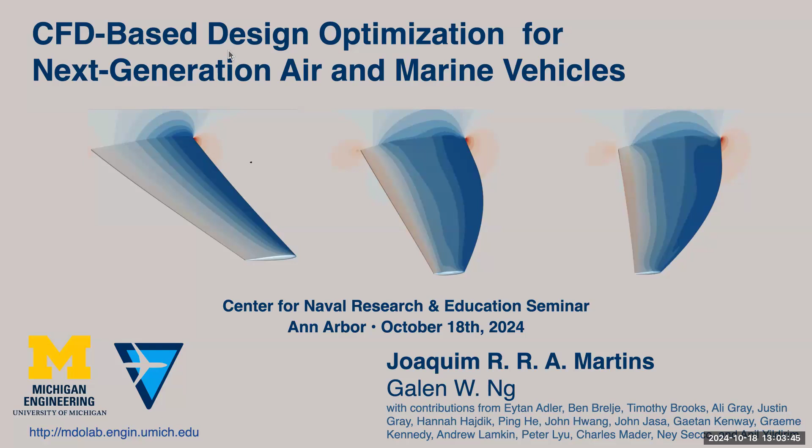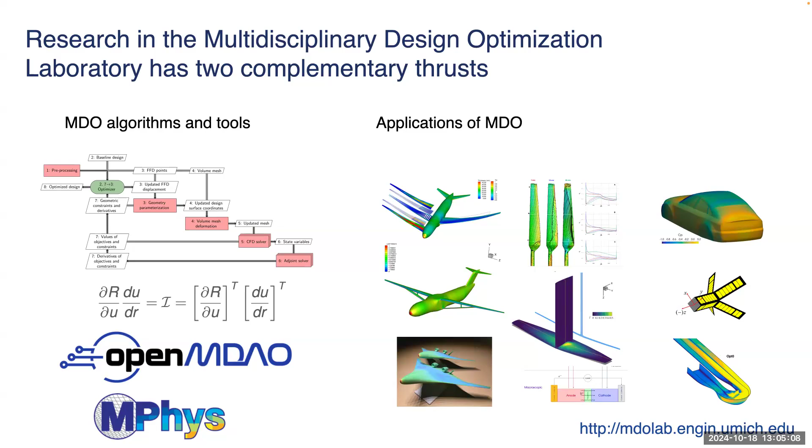Okay, great. Yep. Okay, so those are two main thrusts, the algorithms and the applications. And the applications started with aircraft design mostly, because that's my passion. But then seeing the problems we had solved with aircraft design, we looked towards applications using those same tools. So wind turbines, hydrofoils, even things like aerodynamics, satellite design, and so on. I'm not going to talk about a lot of these applications. I'm going to show some on the aircraft and then the naval applications.

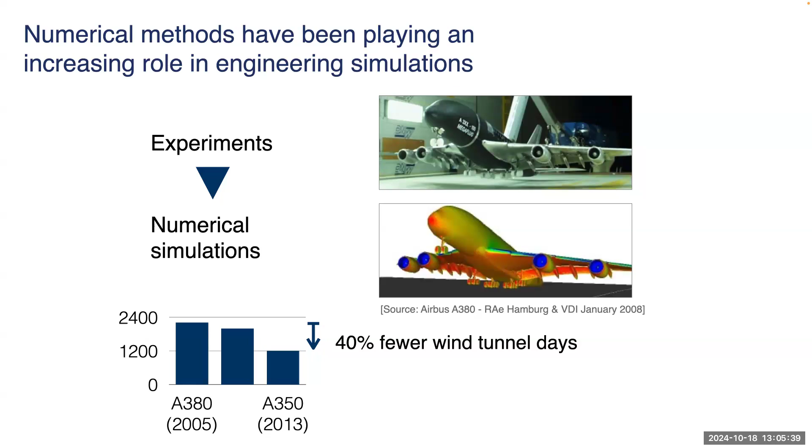All right, so in terms of advanced numerical methods, I don't think I need to sell this to this crowd. But the fact is numerical methods or numerical simulations are replacing experiments. As an example, in aerospace, from the Airbus A380 to the Airbus A350, we had 40% fewer wind tunnel days. And I believe the same is happening in naval, although I haven't checked, but I imagine so. And that's really important. There's a lot of effort here in this center, for example, to really develop simulations, make them faster, make them more accurate, right? And that's really important, right?

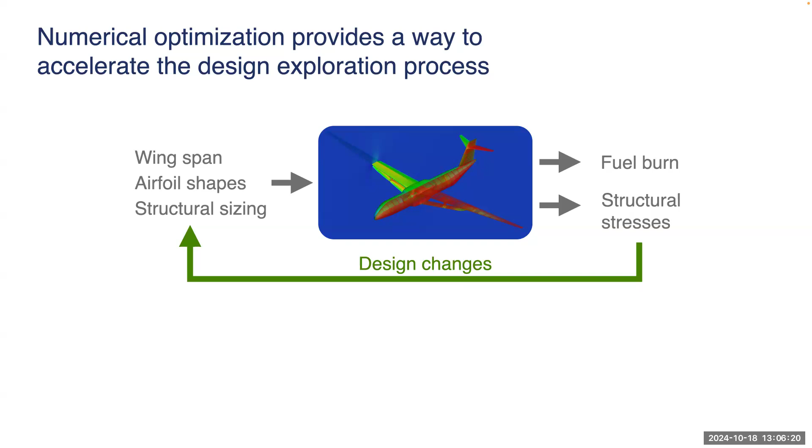But when you think about how you're going to use your simulations, one big application is design, right? And what you do with a simulation when you're doing design, you need to make design changes, right? The chances are the first design you come up with is far from optimal, right? Or not even feasible, and you need to make a design change. And typically these are done by hand using intuition. Maybe you start with lower fidelity simulations, make changes, and so on. It's a very iterative process. And this is where optimization can help, right?

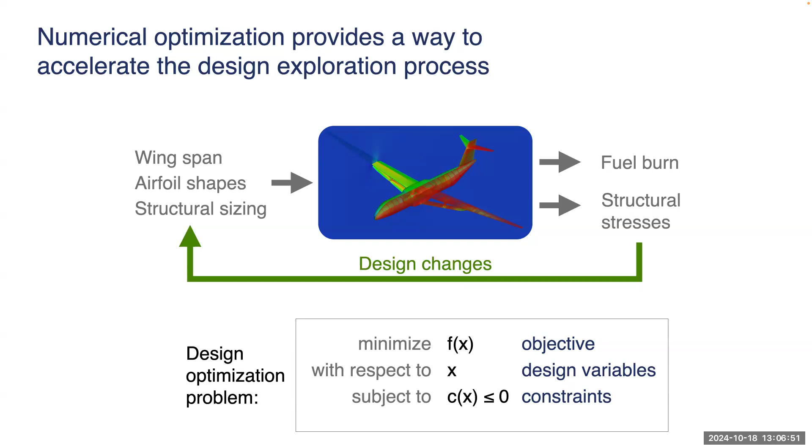So if you have thousands of decisions, thousands of design variables to decide on, what are the chances you're going to get that combination just right? So optimization helps you navigate that n-dimensional space by defining an objective function that you want to maximize or minimize, and then defining the design variables you can change, and design constraints. The idea is that once you define this, you press a button, and out comes your result, okay? I learned the hard way that doesn't quite happen, okay?

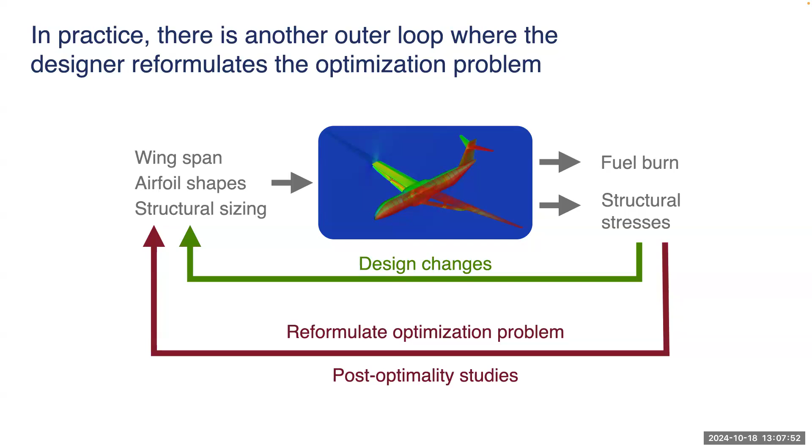In reality, this becomes more of a design exploration tool rather than a one button press solution. Typically, you look at the results and end up reformulating, because you want to add more variables, redefine variables, add or remove constraints, and so on. Maybe you want to change the objective too and try different objectives to see what you get in terms of the trades. This is really important, also learned the hard way: you need to understand what you're getting. You can't just say mathematically this obeys all the optimality conditions, so it's the best design. You need to explain why you think the optimization arrived at that design, and eventually validate it. This is where post-optimality studies come up.

In terms of MDO, multidisciplinary design optimization, which is getting together multiple disciplines, considering their coupling effects, and then considering the trade-offs when you do design. One thing is to consider coupled simulation. The other thing is to do coupled design, where you need to do trade-offs.

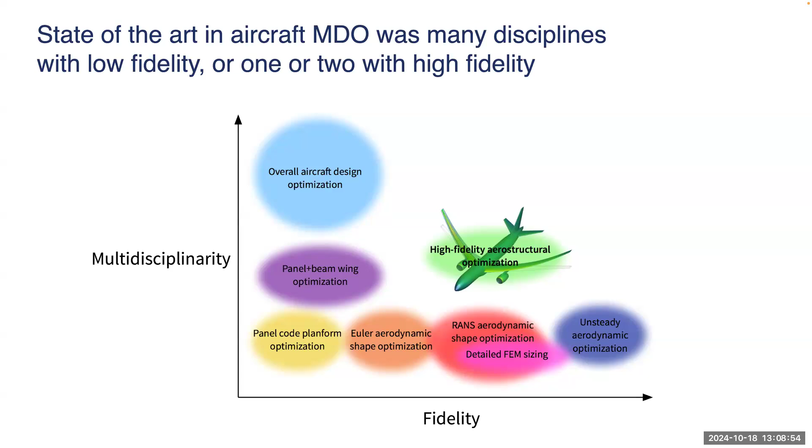The other one is to increase the fidelity on the disciplines themselves, on the simulations. We've been going this direction with single disciplines like aerodynamics, higher and higher fidelity with optimization, and structures as well. But what we've tried to do is go on a diagonal and do two or more disciplines with high fidelity coupled in optimization. I'll show you some results of that.

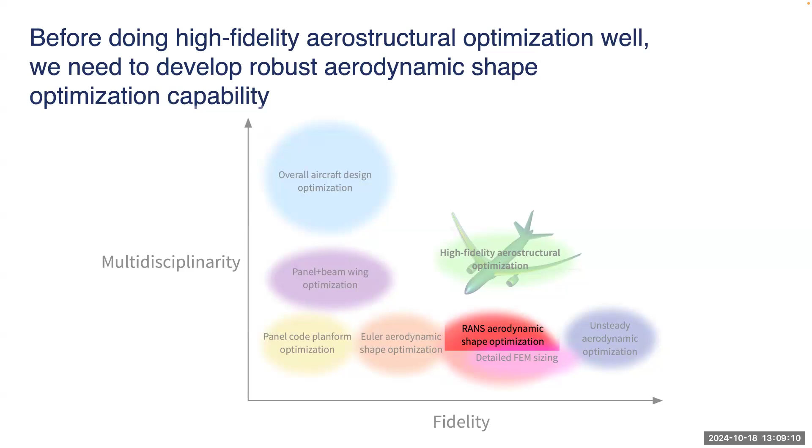But first, I'm just going to talk about CFD, specifically RANS-based aerodynamic shape optimization. To do our optimization, we use gradient-based methods, because these are the only hope for a large number of design variables.

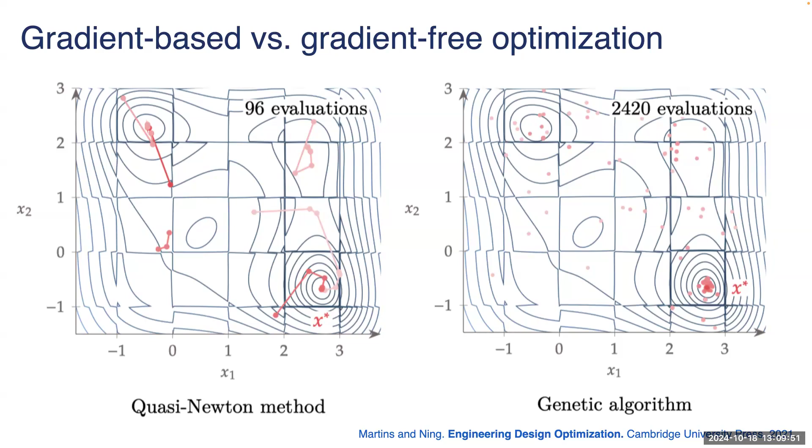But when we scale things up and increase the number of design variables to thousands, we can see that the number of function evaluations needed for that optimization goes up dramatically for gradient-free methods. This is a log-log plot, by the way. But if you can do gradient-based optimization, you reduce the slope significantly. For example, if you use finite difference gradients, you decrease the slope, but it's still pretty high. So the key is to have gradient-based optimization with analytic gradients.

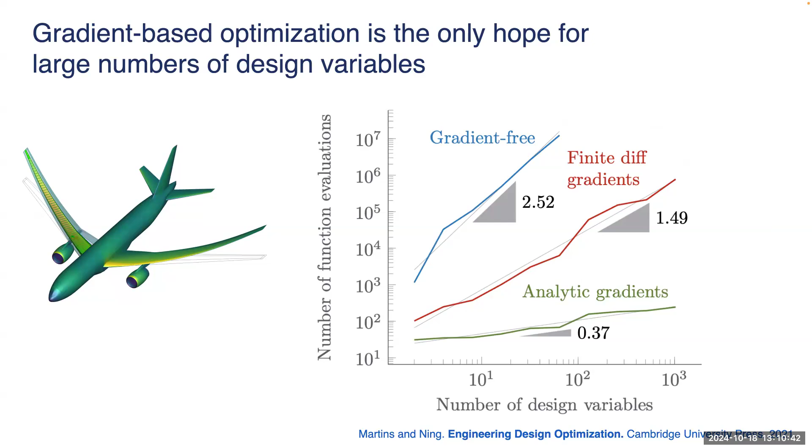So if we can use gradient-based optimization and compute the gradients efficiently, then you're way ahead. You can do problems with thousands of design variables. And this is what we've done. So all the work you're going to see is enabled by this approach.

This led us to develop a framework called MACH-Aero, which couples an optimizer. The optimizer decides what the design variables are. Typically our design variables have to do with geometry parameterization, though there are others. Once you change the geometry, when you're doing CFD, you need to change the volume mesh, so there's a whole approach there. And then we have our CFD solver, and then the adjoint solver, which computes the gradients efficiently. More about that in a bit.

And so this loop continues until the optimality conditions are satisfied. All this is open source software, and each module is wrapped with Python. The underlying code is either C, C++, or Fortran, but everything is wrapped with Python, and I'll talk a little more about these.

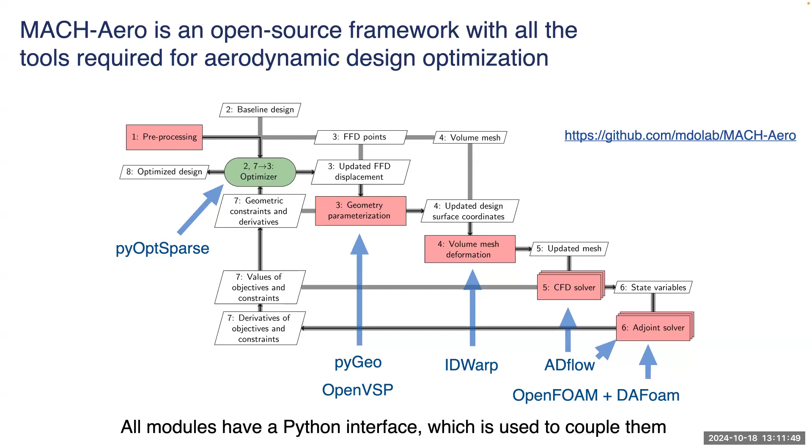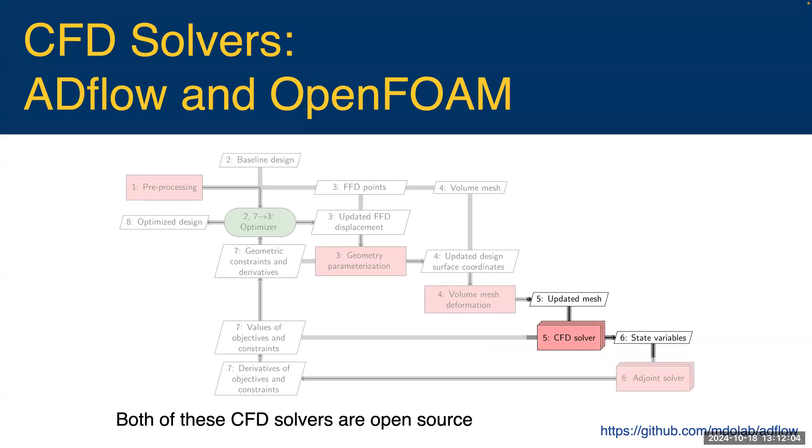In terms of CFD solvers, this is a modular framework, so you can actually use multiple CFD solvers as long as they have the same Python API. We actually have ADflow, which is our in-house solver, more on that in a bit, and OpenFOAM, which is a well-known open source solver. There's also a NASA solver that's been wrapped with Python, Fun3D. But most of the results I'm going to show you here are from ADflow.

These, of course, are parallel codes using overset structured meshes. And very critically here, we use this approximate Newton-Krylov method. This is really critical because we need very robust CFD to do optimization, because optimization will ask for all sorts of crazy things that a designer would not.

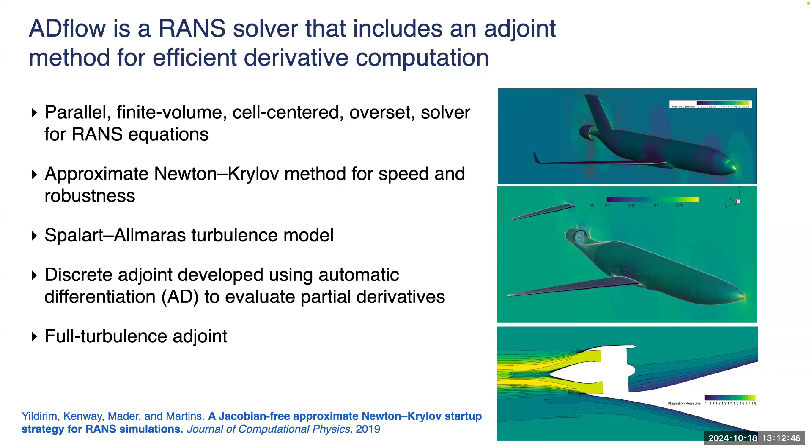We also use a Spalart-Allmaras turbulence model that's fully differentiated with this adjoint. Just to show you how robust this is, here's an airplane, a 777 size airplane, basically at 90 degrees angle of attack, at Mach 0.85. This does not happen in reality. In fact, it's impossible, but it's just to show that we got the flow to converge.

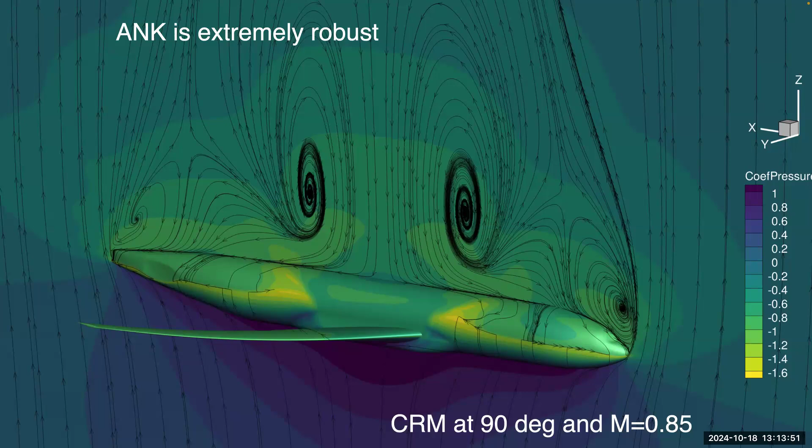Now, if you know anything about flow physics, you realize this is not physical, because the flow should be unsteady. But the point is we can still converge it. Of course, you need to be careful with this. If at the optimum you have something that converges but is not physical, you need to realize that. Typically this is not optimal, it's not an optimal flight condition, but intermediate steps could be. It's important to converge so that your whole optimization process doesn't stall. You don't want to wake up in the morning and find you did a few iterations and stalled, as opposed to chugging through and eventually getting to the optimum.

In terms of geometry parameterization, it's also modular, and there are 3 different tools that we've wrapped. I won't go into detail on all of them. Our in-house one is PyGeo, and this is how it works.

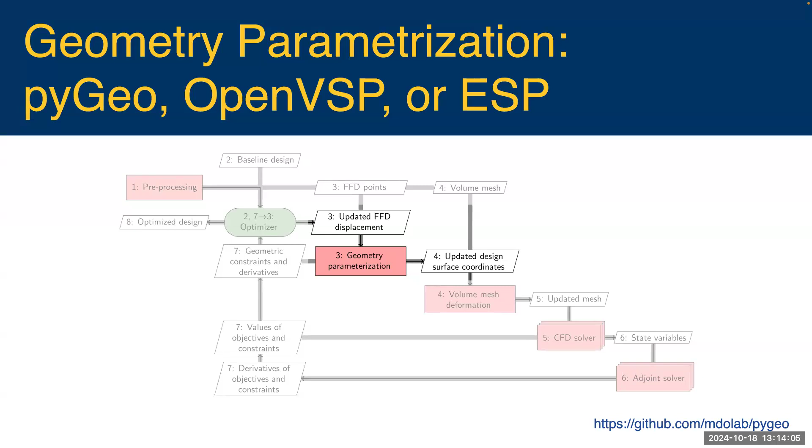There's a freeform deformation volume that you put around the geometry, and then you can move the points on the surface of this volume, and everything inside gets interpolated with 3D tensor splines. So we can do aerodynamic shape of the airfoils, we can do span, sweep, and also twist.

This is a volume that has the geometry inside, so it's not on the surface, but it's close to the surface, ideally quite close. Some people like to talk about putting the airplane in a piece of jello, and then you move the outside of the jello and everything inside gets deformed. That's FFD.

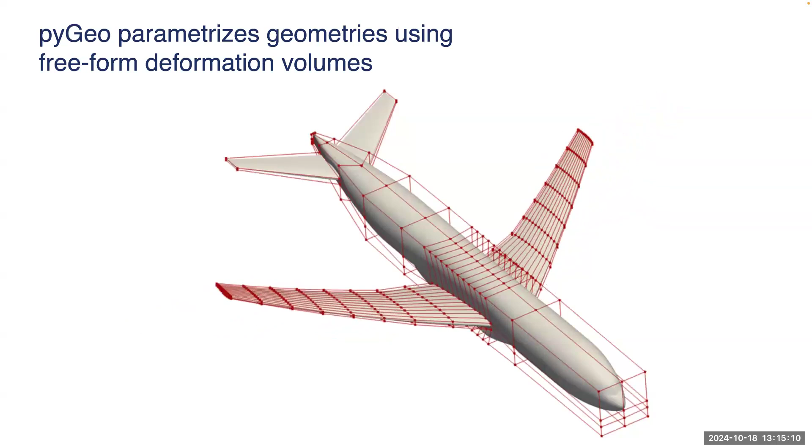We also have used OpenVSP, which is a different way to parameterize, but we won't go into it.

And now for the mesh deformation. Once you change the geometry, you need to deform the mesh. Our tool is called IDWarp, and it uses an inverse distance approach. The key thing about all these modules is you don't just need them to work as in analysis, you need them to be differentiated, because we're going to have gradients of the whole thing, the whole chain.

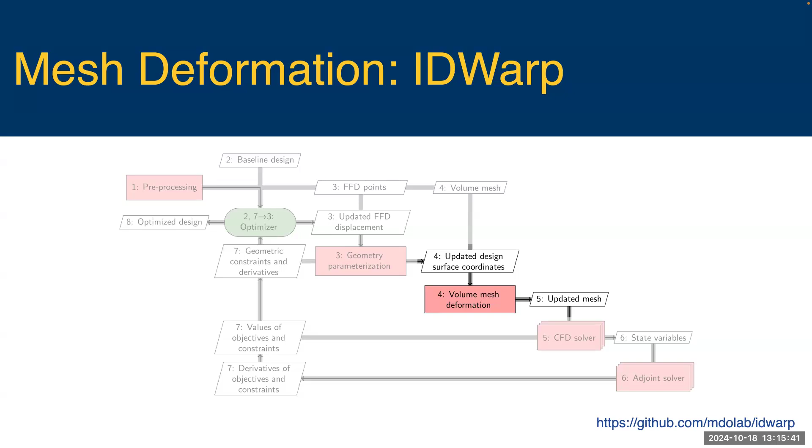Here you can see IDWarp working together with PyGeo, where we change the surface of the airfoil, just a 2D case. You can see how the volume is on the outside of the airfoil. Move this point, everything inside gets smoothly deformed. Then, as a separate step coupled to IDWarp, it propagates those changes to the far field in a smooth way, so you have nice CFD. You don't always get nice CFD, and you don't always get a nice mesh, full disclaimer, but mostly we do well enough for our optimizations.

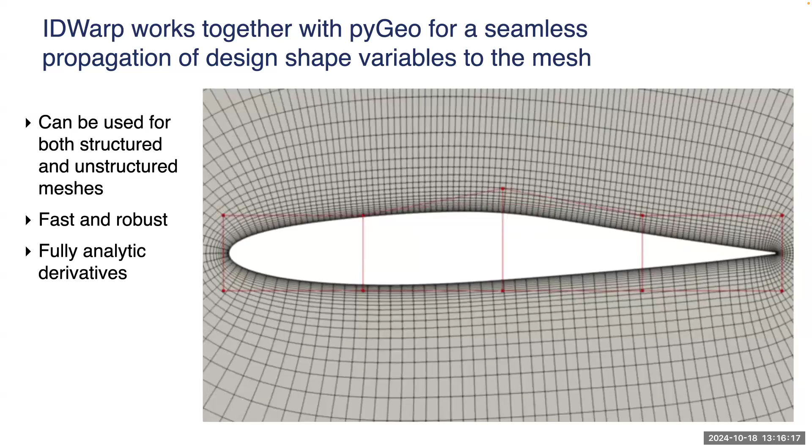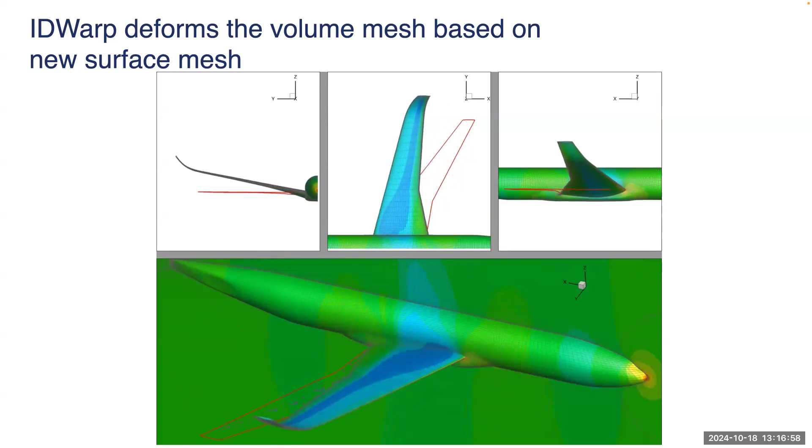This is a similar thing in 3D, showing the CFD solutions for every step here. This is not an optimization, it's just a way to show off the robustness of the tools. We basically took a wing, a 777 size airplane wing, unswept it completely, extended the span, added dihedral, folded the tip, and you still have a valid mesh. Again, full disclaimer, one step after this the mesh failed. But it's enough to do planform optimization, which was unprecedented in this type of CFD-based optimization.

Now for the optimization algorithms. As I mentioned, gradient-based, we use an algorithm called SNOPT, which implements sequential quadratic programming, and we developed a wrapper for it that we then extended for multiple optimizers. The idea is instead of each time using a different optimizer and needing to read the manual and conform to that API, this is a unified API where you don't need to get too much into the weeds of each optimizer, just select which one you want. As long as you follow this API, you're good to go. This is open source and includes a tool to visualize the results.

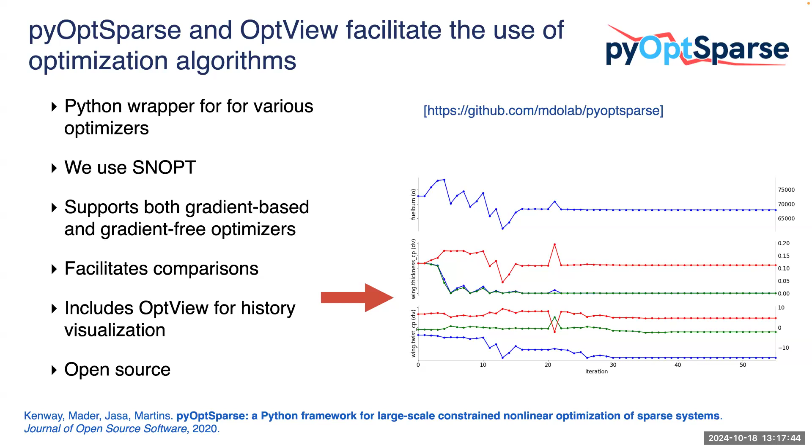All right, now for the derivative computation or gradient computation, which is really critical. Won't go too much into detail, but just to give you an overview of different methods for computing derivatives, I look at it as three different paradigms. One is you zoom all the way out, all you see is inputs and outputs, and you want the derivatives of these outputs with respect to these inputs. This is a vector in general, this is a vector in general. You can't do much there except do finite differences.

There's another approach called the complex step. If you haven't heard about it, check it out. It's really neat, very useful. And if you have the source code, you can actually do this. This is not efficient though, the cost here is proportional to the number of x's, the size of x. So this is out for hundreds or thousands of variables.

In the middle here, we have another paradigm. Now we open the box. Now we can see inside, we can see the equations you're solving, you can see the solver, you can see the state variables, you can see the functions, how they're being computed with respect to the state variables. Then you can differentiate this, I'll show you in the next slide, and find an efficient way to compute the gradients.

The next one is you zoom way into the code, looking at every single line of code. Then you can use what's called algorithmic or automatic differentiation, which is software that goes through your code and differentiates every single line. It's sort of a brute force approach. In reality, what we do is we combine these two. We form these equations, which we know what they are, and then compute these partial terms with AD.

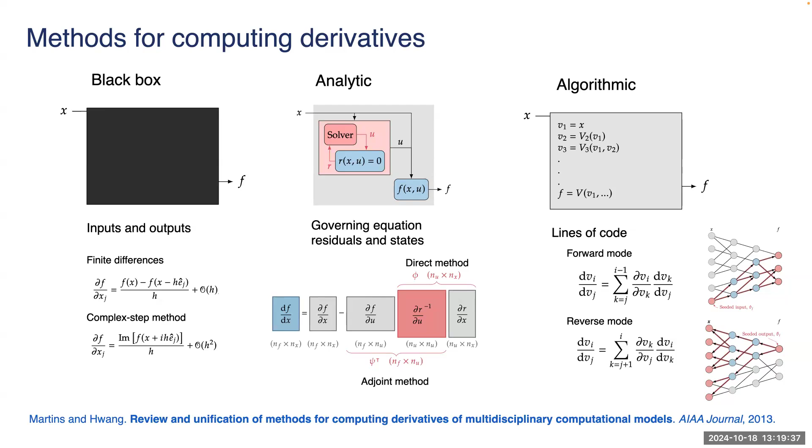A little more on the adjoint method. So again, we open the box, we know where the residuals are, we know what they are, the states and so on. And now we're going to use the general approach to do these derivatives.

We have a total derivative of f, considering two paths. The one that goes directly to f, that's this partial derivative, and the one that goes through the solver, that's the second term with the two terms there. The partial derivatives are easy to compute, and cheap to compute. Sometimes not so easy, but much easier than others.

But this total is challenging because it needs to consider the solver. So du/dx needs to consider this path, that's what makes it total, because it requires resolving the problem. We don't want to resolve the problem. We don't want to linearize this, so we don't need to deal with the simulation again. Just do one simulation, then do the derivative solve.

So the trick here is to look at the residuals and realize that the total variation of residuals has to be 0 for it to remain feasible. And so we can write this total derivative here, and then rearrange to get a linear system whose solution is du/dx, and replace it in there. And what we get is this equation.

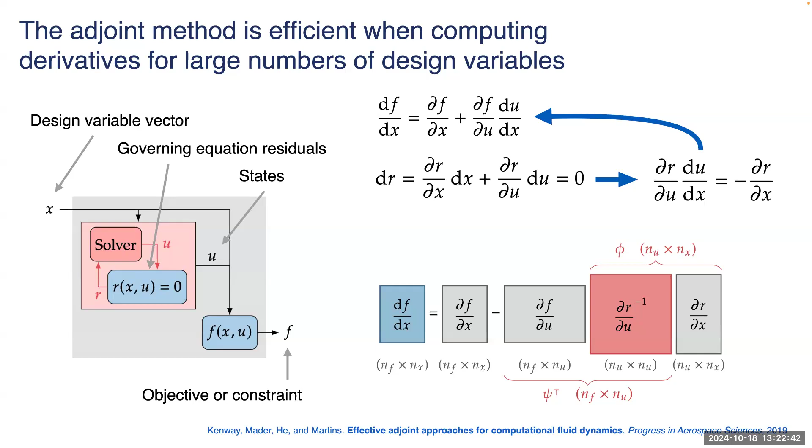So in these aerodynamic shape and hydrodynamic shape optimization problems I'm going to show you, we have 2, 3, a few more maybe objectives and constraints. So number of f's is a few, number of x's is hundreds or thousands. So there's no doubt that the adjoint method is going to be advantageous there. And that's the main thing about the adjoint method, it just makes it much more scalable with respect to design variables.

That's the key. So these are some overview. If you want more details, the PDF of my book is available for free, and you can read it at your own leisure.

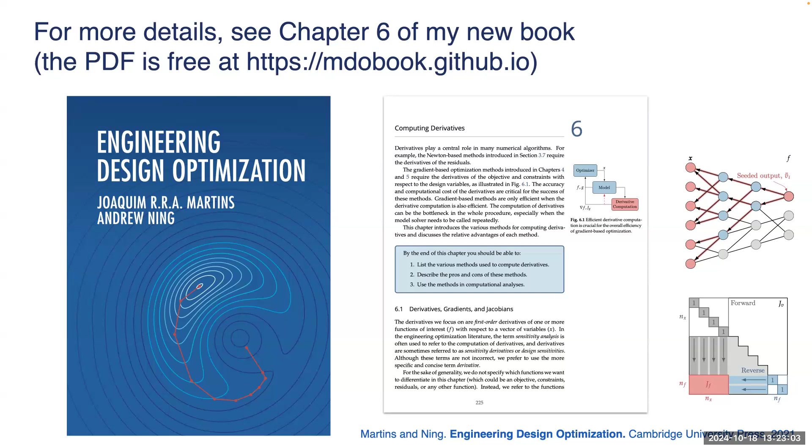I'm also teaching AE 588. I think I have a couple of naval students in there.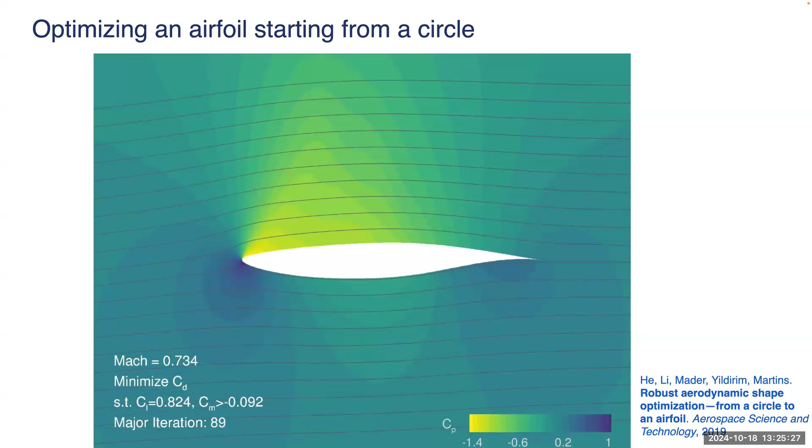It's a bit of a detail - only major iterations are shown, and within major iterations there are minor iterations that go crazier, not shown here. I have a screenshot somewhere, but didn't include it. Anyway, even solving this steady, you'd consider this challenging to converge.

All right, so now for 3D, this is a benchmark - again that wing from a 777-size airplane. It's a benchmark done with a group in the community, and this is something we solved: fixed planform, optimizing all these shapes.

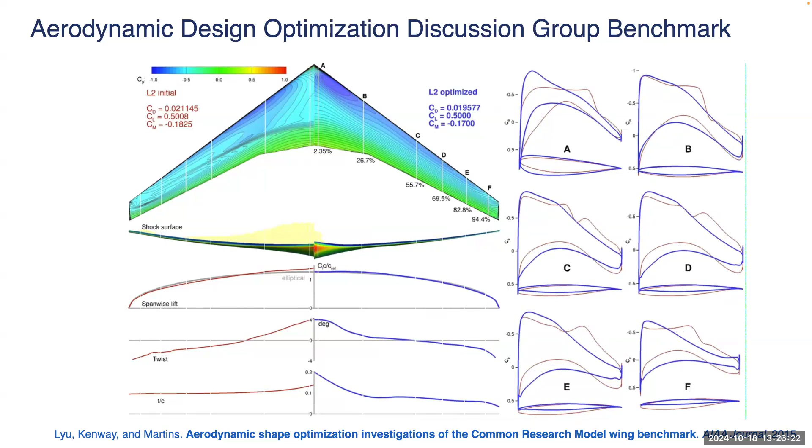You can see for minimizing drag at one condition, we again get that supercritical airfoil. The airfoils were supercritical to begin with here already because it's a reasonable design, but it eliminated the shocks and reduced the drag considerably. You can see just qualitatively looking at these pressure isobars how nice and parallel they are relative to the shock you have here - an elliptical distribution, the textbook solution you'd expect.

Now going on, this typically takes a few hours, depending on the number of cores. We always aim to do things overnight, but some of the more complicated, more involved simulations - the optimization takes maybe 24 to 48 hours, but typically never more than 2 days, because that would severely lengthen graduation times. And because we want to do multiple optimizations, try different things and so on.

But we do keep an eye on that.

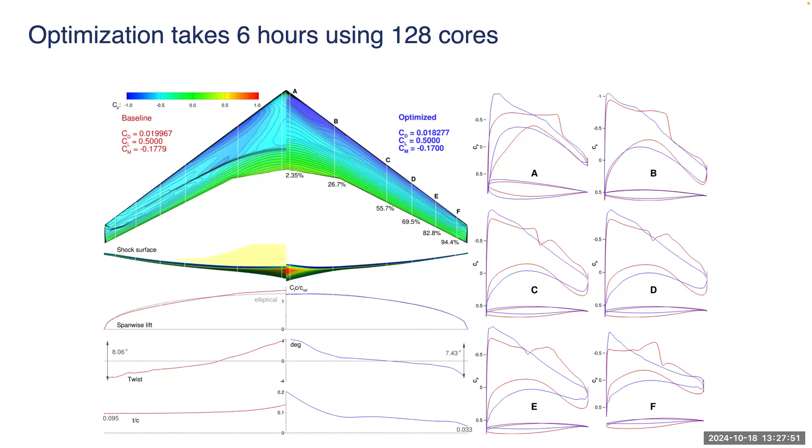So on that theme, starting with something else, I actually challenged my students at the time to give me the crappiest wing that you can start with and still get the same result. And he showed up with this. I thought he was joking. I said, this is not April Fool's today.

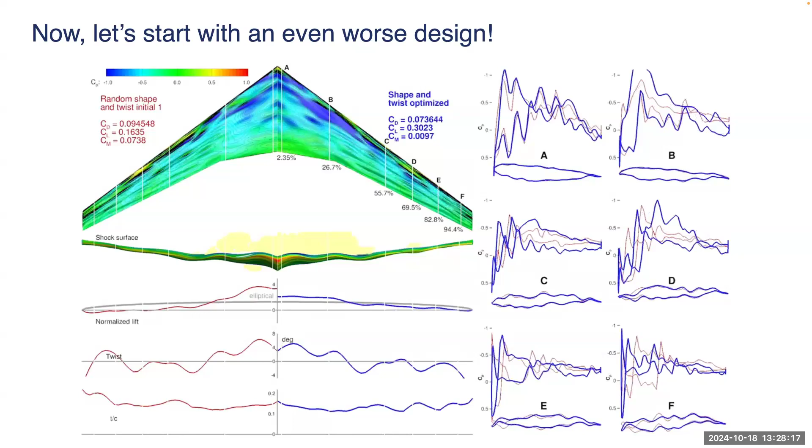But it did work, it just takes a bit longer. Again, the physics, the simulation on the first few iterations is wrong because there's separation and whatnot, and it's forcing to be steady. But the gradients are pointing in the right direction, towards flattening that shape, removing those wiggles. Once you get to this shape, now the physics are valid.

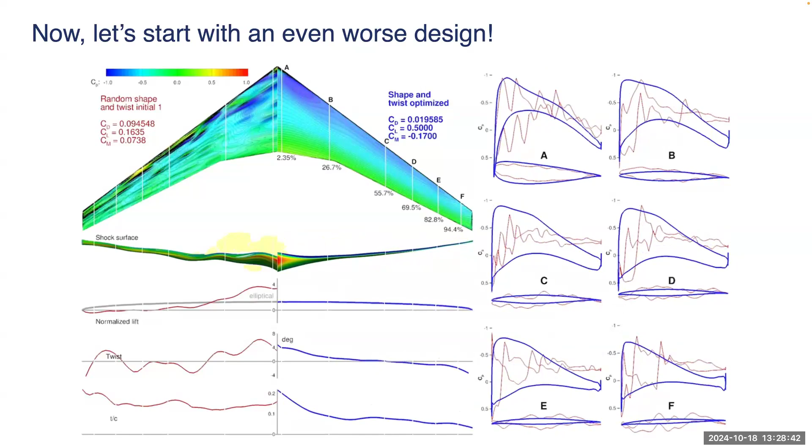On the theme of validation, we published all the geometries and grids, baseline and optimized, online and made them available, hoping people will try it. ONERA in France did download those and analyze and verify, but the one that was really a big success for us was the validation that Boeing did with their adaptive mesh refinement code called GGNS, their state-of-the-art. We got within 1/100th of a count in the result. So the results are now pretty old, but they age very well.

You can see on the drag polar, of all the others that tried this problem, we got the best, the lowest drag for what was asked. We minimize the drag at this CL. And you can see the drag polar is really specialized to reduce the drag there.

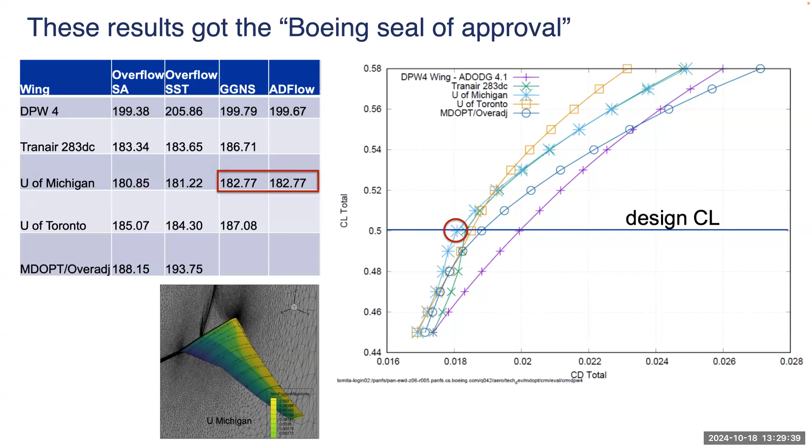Now, being academic, I like these sort of problems, and I always dreamt of doing this optimization starting from a sphere. Take a sphere, put it in the simulation, run an optimization, press a button, out comes an airplane or a submarine. And this one here, actually, in retrospect, could be sort of a single-person submarine. And if you wanted here to minimize the drag, subject to containing the person.

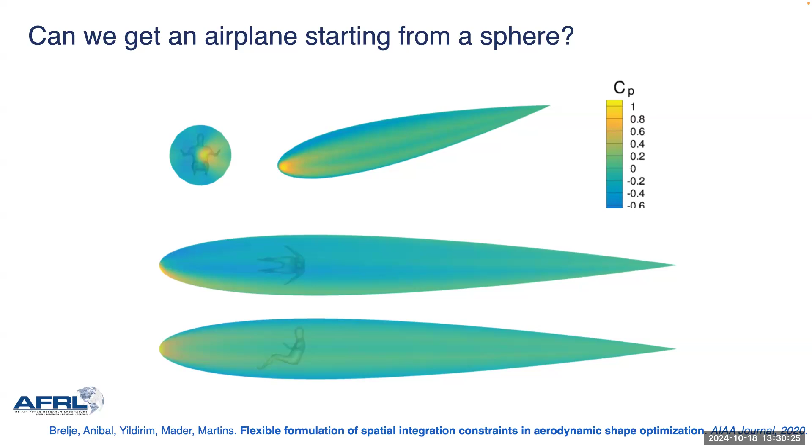It's a packaging problem. So we actually developed an approach that does this for arbitrary shapes inside the package. In this case, we put a person in there. And what happens there, if you minimize drag, there's no lift constraint in this case, just minimize the drag, this is the shape of your single-person submarine. Of course, you're probably going to need some other systems and whatnot, but you really reduce the skin friction drag a lot by reducing the area and shrink wrapping the person and making it non-axis symmetric.

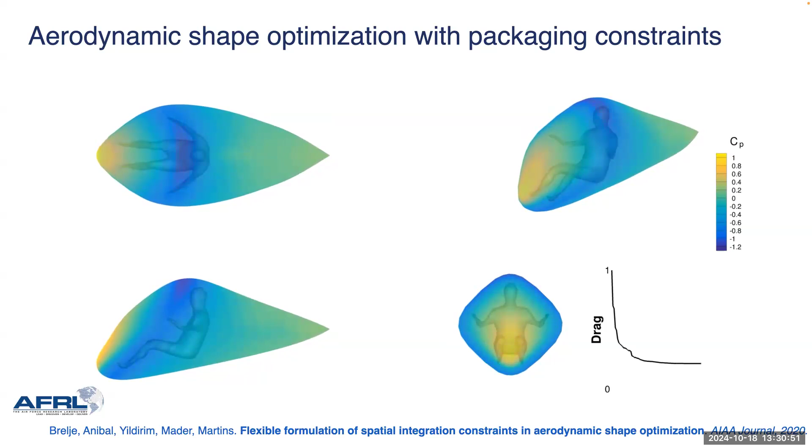So there's a lot of applications there, if you can imagine. Now, that's just aerodynamics, but that's not enough because wings are flexible.

Can I ask a question about the person problem, and even the air problem? In terms of the geometrical parameters, does it boil down to constraints on thickness in different directions? No, it's more general than that. We have the thickness constraints, we have volume constraints for a long time, but what we are wanting is something more general, where it's really about that shape. What happens is we need to compute all the distances from the surface to the outer mold line, so like a distance function from the surface. Yeah, exactly. How you do that, there's a lot involved there, explained in the paper.

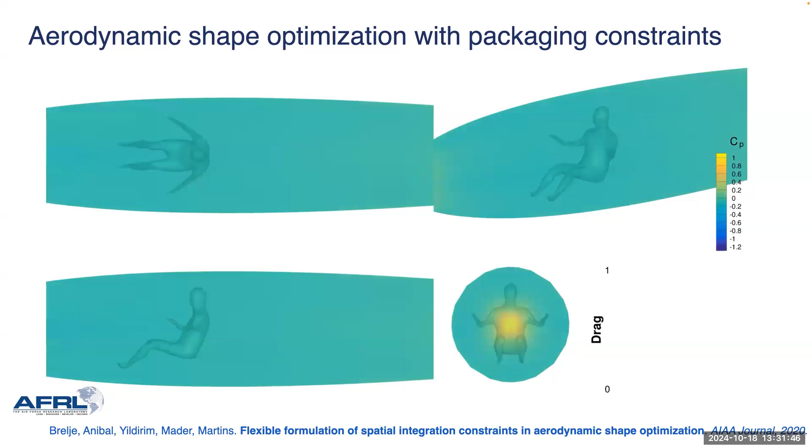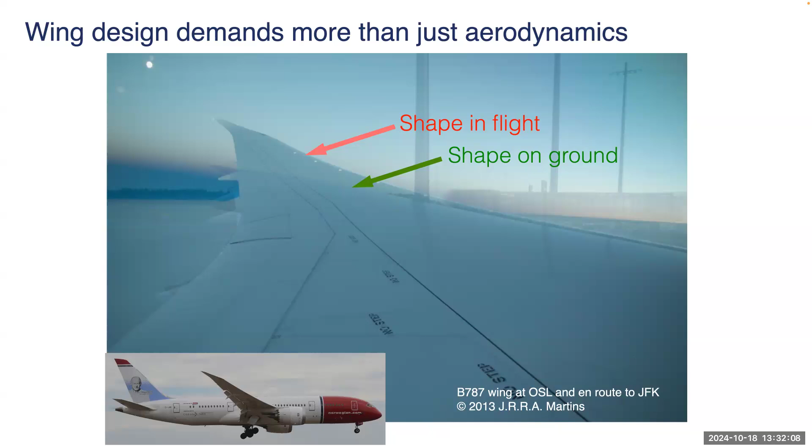Aerodynamics or hydrodynamics is not enough. Structures are flexible, so we need to consider that. These are two photos I took on my first flight on the 787, flying and on the ground, and you can see the difference. Actually, it doesn't do justice because if you look at 787 wings, they're really very flexible. And it's a beautiful thing to see.

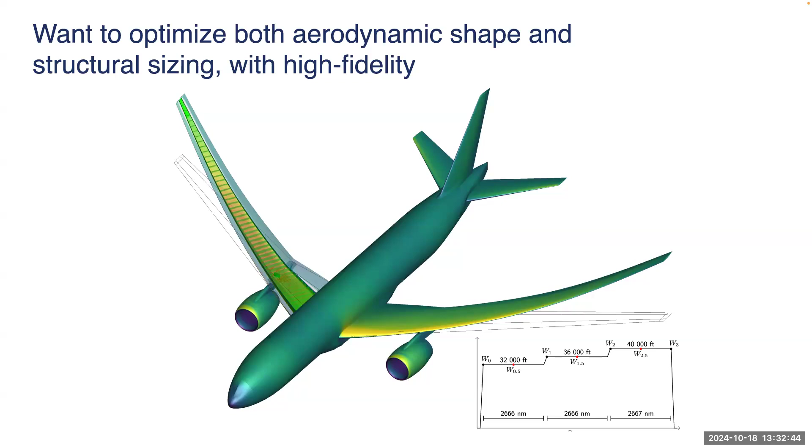So what we need to do then is to couple the CFD with a finite element structural model. In this case, I would say medium fidelity, not super detailed, but more than just a beam. It's actually a built-up wing box, coupled to find the actual shape at each flight condition. So depending on the flight condition, you have a different shape. We consider that, but then we also want to optimize not just the external shape, but the internal structural sizing. So here's the framework that we developed for that, an extension of what I showed before with the addition of the structural solver. Now we couple the structural solver with the flow solver and then this inner loop to find the shape at that flight condition.

Now, the next trick, and it is a big one, is we now need a coupled adjoint solver to find the gradients considering the coupling. If you imagine changing the size on one piece of the structure, that changes the displacements. The displacements change the loads, the loads change the displacements back. It's a coupled effect, and that gradient needs to take all that into account, and it does. But then you need to develop this coupled adjoint. So the equations I showed, you need to augment that with the structural system, then do off-diagonal terms and get the coupled derivative, the coupled adjoint system.

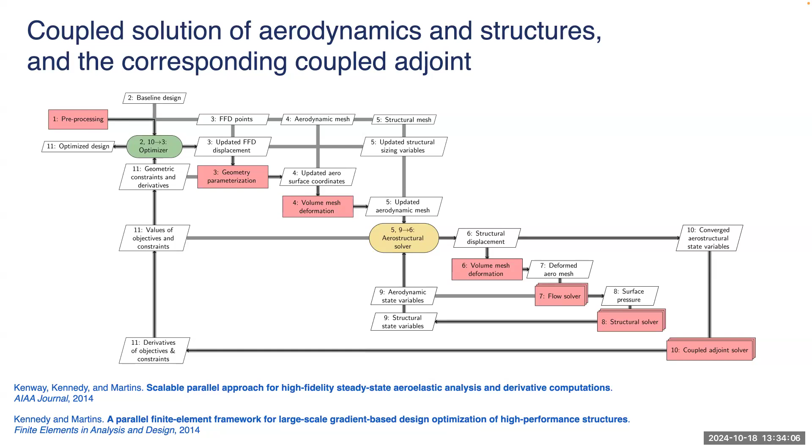We actually generalize that approach for more than two systems in general, in a framework that NASA is now maintaining called OpenMDAO. One of the core capabilities is doing the coupled adjoint for multiple arbitrary disciplines and solvers. But I won't get more into it.

What I'll show you is the aerostructure optimization. Again, this is that same Boeing 777 size airplane, called the Common Research Model. It was developed by NASA jointly with Boeing. What we did, because that was developed by aerodynamicists who just defined a shape as a single shape, not flexible, we reverse engineered a structure such that at the nominal flight condition, we retrieved exactly the same shape.

The other thing we get out of this optimization is now we're optimizing the built shape, which we call the jig shape. By doing that, we're directly optimizing what's going to be built, taking into account how it's going to perform in flight. Typically in industry, they tend to optimize the shape in flight and then reverse engineer the jig shape to be built. Here we optimize the jig shape directly.

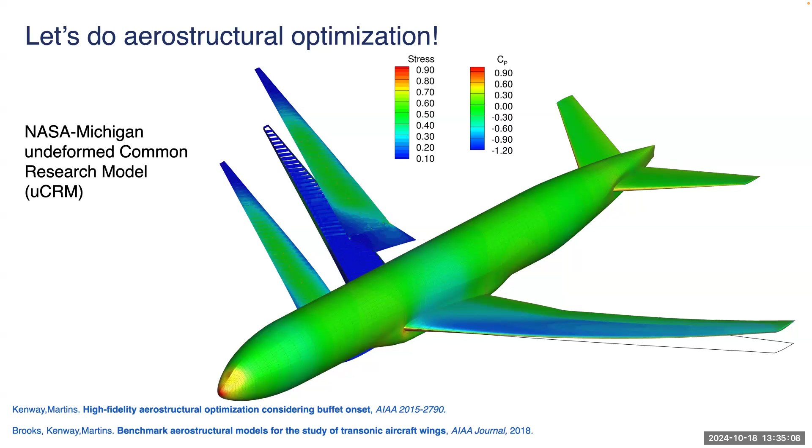In terms of design variables, we have airfoil shapes, but now the airfoil shape is coupled to the internal wing box. So whenever you change the outer mold line, you need to change the internal wing box as well. All that is linked. Then we have sweep, we have span. We also have a tail rotation because we need to trim the airplane.

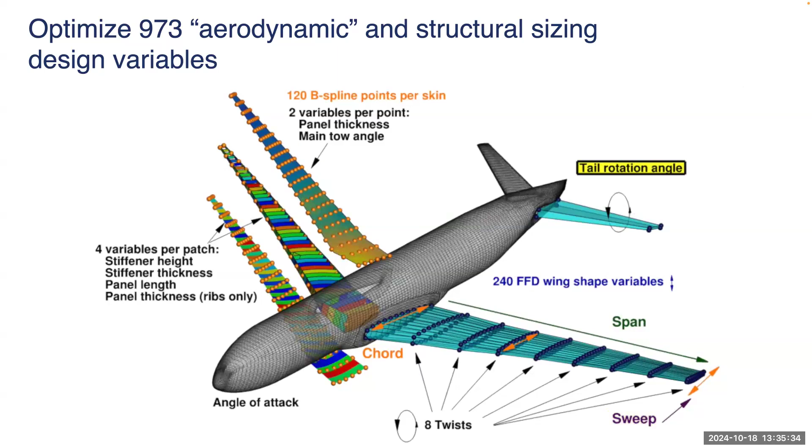There's a lot more to this problem that I'm skipping. It basically has about 1,000 design variables, I kind of showed that to you. But it also has multiple flight conditions for cruise, where we're computing the aggregate fuel burn, and multiple conditions for loads. On those conditions, we don't care about fuel burn, we don't care about drag. All we care about is that the wing doesn't break off. So there's a pull-up condition, a push-down condition, and a gust condition.

But we get very different results. Fuel burn really extends the span because it's more biased towards reducing drag. We're considering both weight and drag and their trade-off. But when we minimize fuel burn, weight is important, but drag is more important, so it extends the wing to reduce induced drag. In the process, you get a wing that is heavy, but burns less fuel. If you minimize takeoff gross weight, drag is still important, but it's more biased towards weight, so you get a lighter wing that burns more fuel.

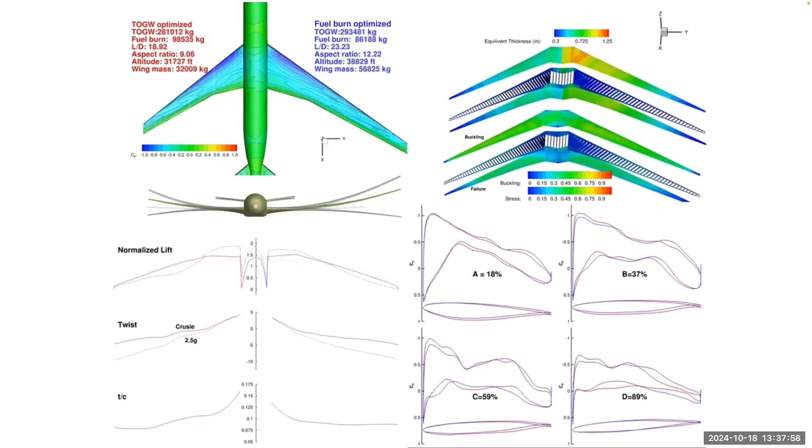Here, there are no thickness constraints. Before, I didn't explain this, but in aerodynamic optimization, you have to have thickness constraints, otherwise you get a much thinner airfoil. Here, we don't have such constraints because we have a wing box. If the optimizer tries to thin it, it'll see it needs to beef the structure up, and the weight is going to increase too much, which it doesn't want. So it does the trade on the thickness, and it does the trade on the span automatically, taking into account the objective function that you ask for.

This is one of those that takes 48 hours, took 48 hours on, I think, 200 procs. No, it was more like 1,000 procs, yeah.

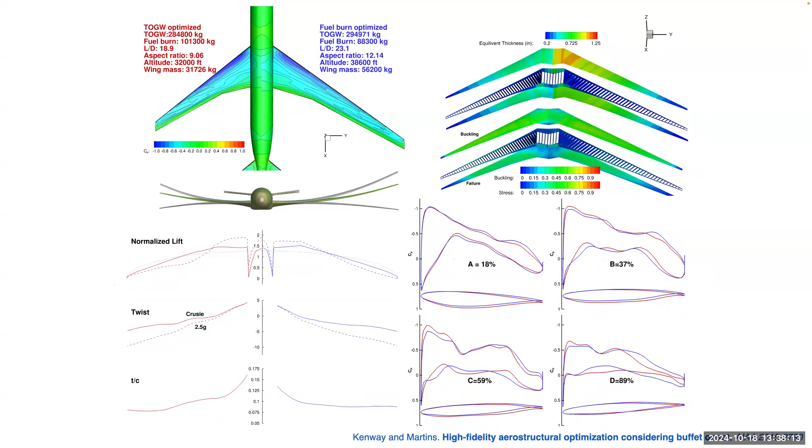Now, let's talk about the good stuff: the marine vehicle application. This is something that started kind of by accident, a nice accident, with Professor Julie Young, who used to be in this department here. She saw my work, and she invited me to join a project she had with ONR on lifting surfaces.

We supervised three students. If Galen there graduates, he's on track, by the way. He's very well on track. So it's been a very nice collaboration. The results you're going to see here are from that collaboration.

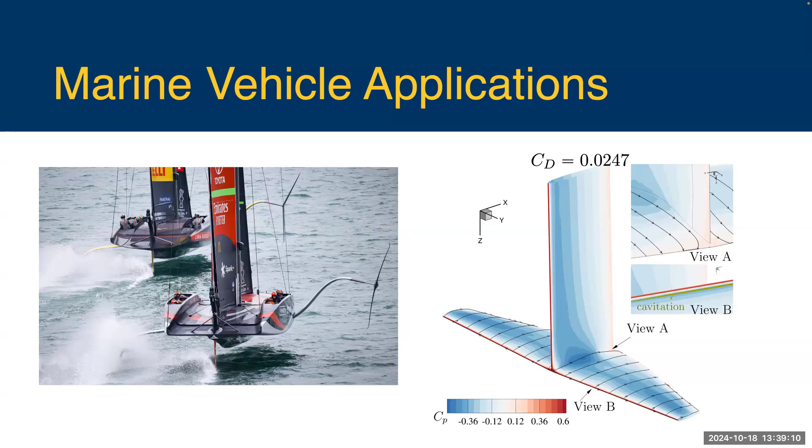So let's get right into it. One of the things that's different in aerospace, we have shocks. You don't have shocks, but you have stuff that I think is trickier actually, which is cavitation and ventilation. We didn't even get to consider ventilation yet, but we are considering cavitation.

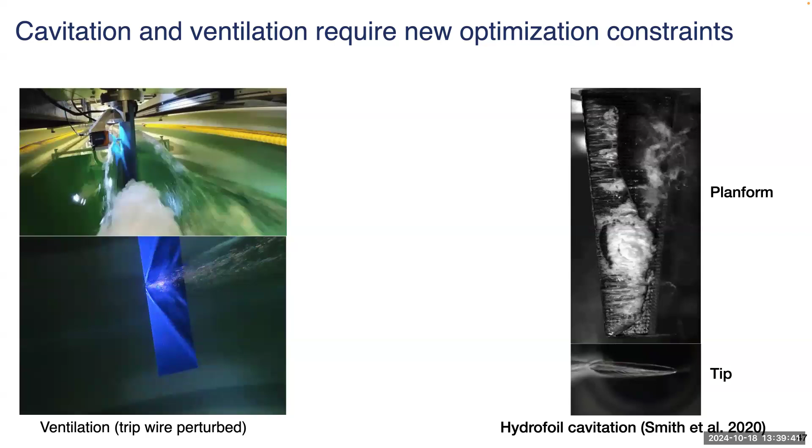That's one of the things that was developed in this collaboration, a way to constrain cavitation. But in the end, it's really just about constraining CP. That's the way we did it.

I think it gets really interesting with hydrofoils when you have, and we're just doing single phase, right, for just the water, not considering the surface yet. And what we do is constrain the peak, the CP peak, based on the cavitation number.

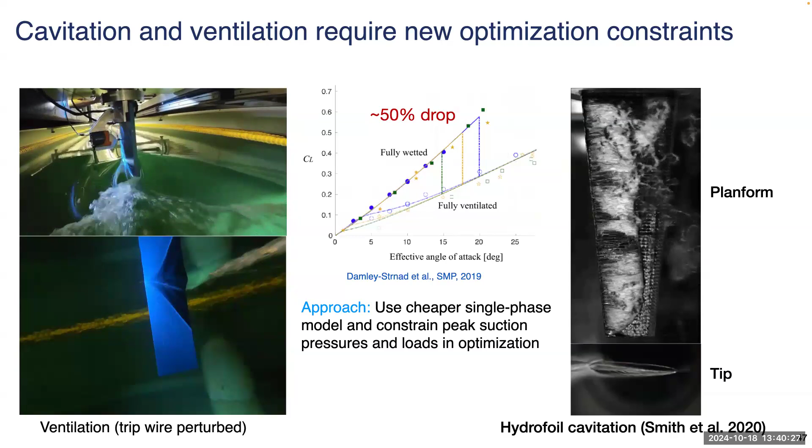So the main thing here is that if you design an airfoil and you have points where you're cavitating and you're tolerating cavitation, but you don't know what the drag is, you cannot do that trade. So all we can do right now is constrain cavitation, and that works really well. Just constraining the CP works really well. I'll show you that in a second.

The way we do this is we basically reused this separation sensor, because in transonic aerodynamics we were trying to avoid what's called buffet, a separation behind the shock that then causes vibrations. We figured out a way of quantifying separation, and that was basically the same formula we used for cavitation.

So basically you detect areas where you have CP that's below cavitation, quantify that area, and then have a design constraint, aggregating into one constraint in the optimization to avoid that.

This is using an aggregation technique called the Kreisselmeier-Steinhauser function. It has this parameter rho that, as it tends to infinity, the whole thing tends to the max of the quantity. If we just use the max directly, it was very confusing for the optimizer because it's a gradient-based optimizer—it needs relatively smooth functions, and the max is not a smooth function. So that's why we developed this.

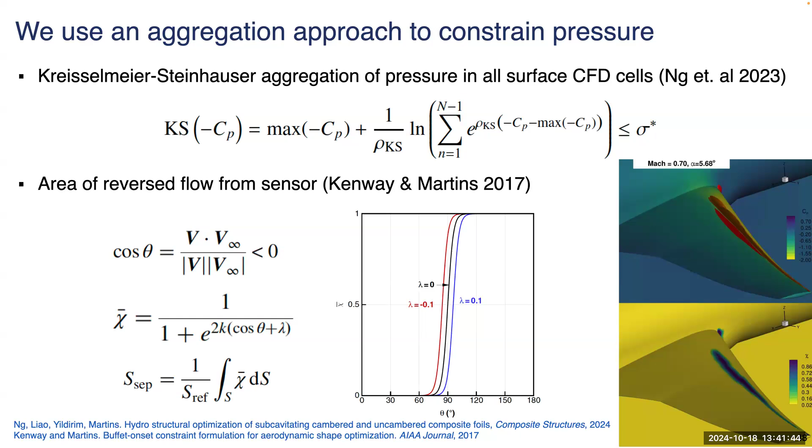And that worked really well. Now, one of the big things we did was to validate this experimentally. I'd never done this on the aero side, so I did it first on the naval side.

Again, thanks to Professor Julie Young, with a collaboration with Australian Maritime, the university there, we basically built one of our optimized shapes. This was a baseline, a NACA 0009, analyzed with our CFD and experiments, and you can see here how it matches. Then we optimized the shape to minimize drag at a certain CL.

And again, very good matching between the experiment and our numerical results. Nitin Garg was the student who worked on that.

He was the first student we had together. He actually went on to work, well, several jobs, but one of them was with Ineos Team UK for America's Cup, and he was there until recently. It's too bad he can't tell me anything about what he did there, but I'm sure he did good things.

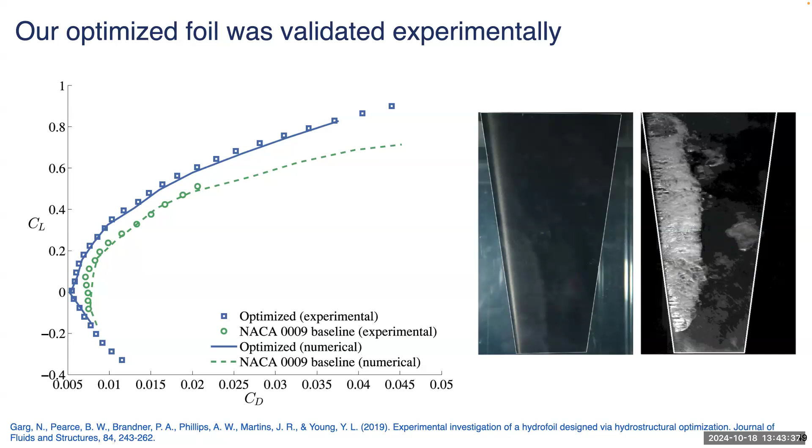So we also progressed to the design of composite foils. There we actually did this optimization with planform variables, because the previous one was a shape, varying the chord, varying sweep to see what we can do there and how we can improve the design, then considering a composite material with a couple of different ply angles. The idea there is to do hydroelastic tailoring by changing the angles as well as the shape and everything together. The hydrostructural problem is a bit different from the aerostructure I was showing because these are solid material.

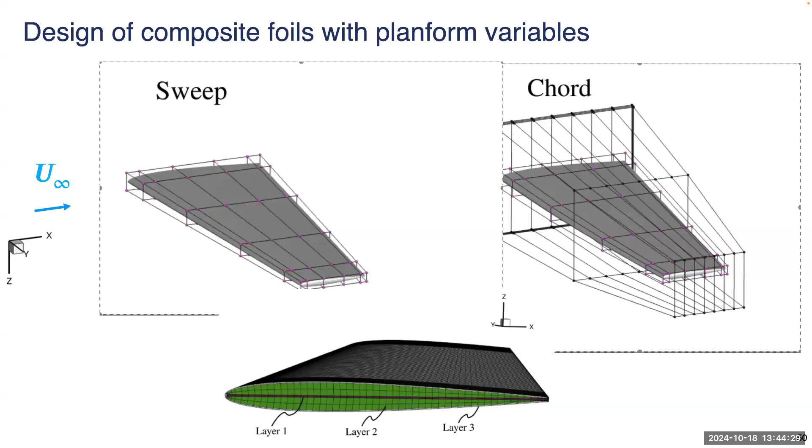So that's an interesting problem, but still the trades are there, because you make it thicker and then it's more rigid, so all those trades are in there as well as the fiber angles. The idea again is to use the fiber angles to tailor the directional stiffness. We've seen that in previous papers, not just for statics, but also for dynamics, changing the modes.

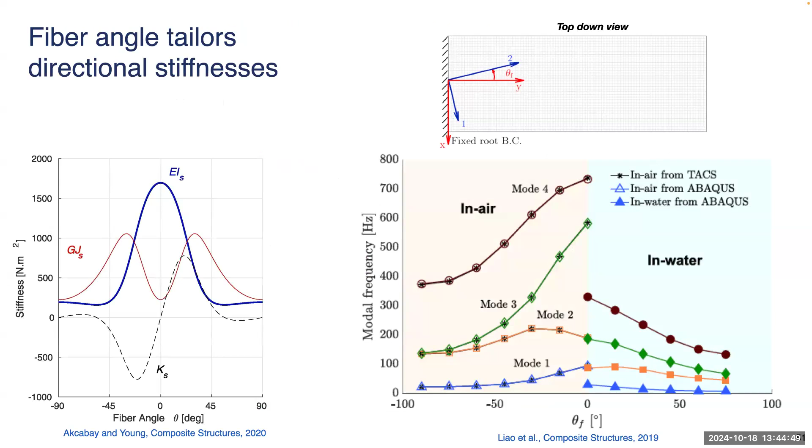So here you're solving the ideal gas compressible equations, or what are the governing equations? We're really just looking at CP, not doing any gas modeling, just single phase incompressible water. All we're doing, as a surrogate for the cavitation constraint, is a CP limit.

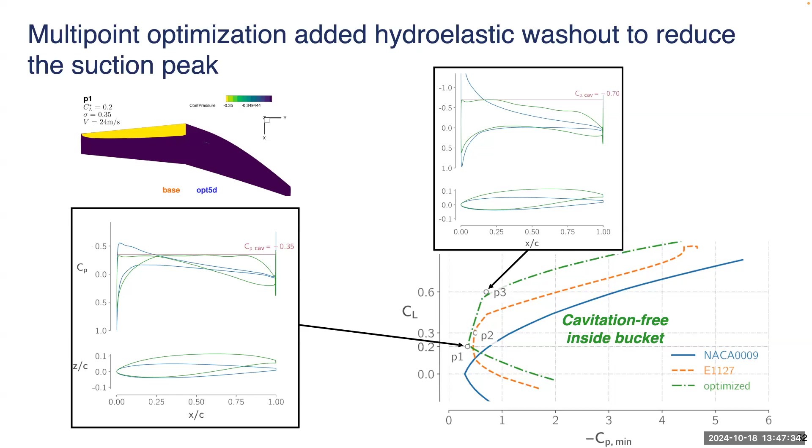We're working towards validation of this now with the same collaborators. The Australia Defense Science Technology Group is building it, and the Australian Maritime College is testing it, which should happen later this year. They're building the composite one now, and the baseline is the same as before, so we're also reusing that data.

We're a bit anxious to see if that's going to match well, because this process, when you have experiments, takes so long, and we probably have no chance of redoing it.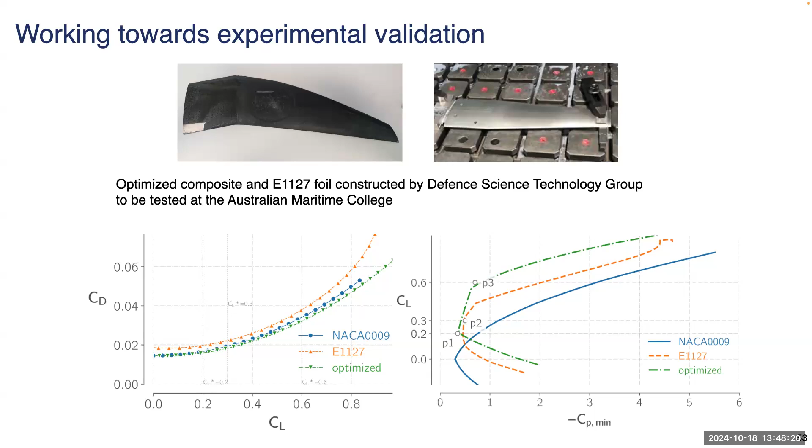So now, one other topic: talking to industry and Navy, we've seen there's a lack of tools for design intersections. Typically an intersection like this, you'd imagine.

This is literally done, at least on the aero side, by taking some clay and shaping it by hand in the junction, doing a few wind tunnel tests—a cut and try method. That works pretty well, but designers are always wondering, can I do better here, can I do better with intersections?

So we started a project looking at those challenges, looking at the T-foil. Can we optimize the shape of the foil, as well as the strut eventually, and so on, again with cavitation and also separation constraints. I mentioned the separation constraint before, and we actually use that here.

So we did some optimizations here. This is the final one where we lowered that by 6%. We just put two surfaces together with no tailoring, and this was the result.

We had cavitation initially at the suction peak because of the superposition of flow acceleration from the vertical and horizontal surfaces, but then we eliminated it by reshaping it. You can see the reshaping here, which is quite intricate.

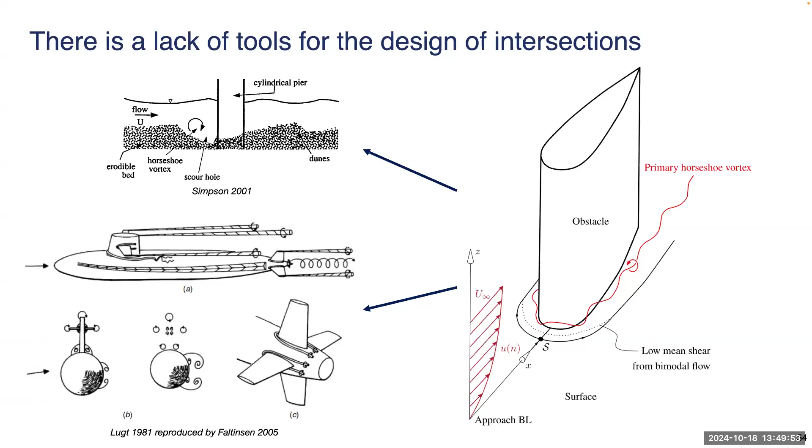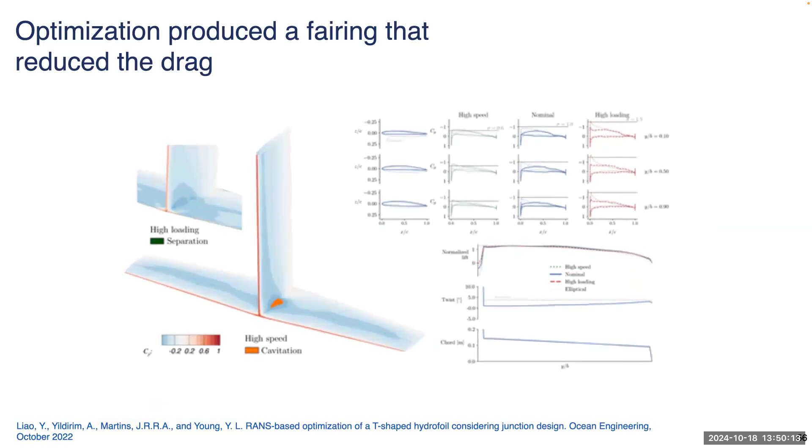I have it on the next slide, not here—you'll see it on this slide. We also got rid of separation here. There's a little bit on the trailing edge that's difficult, but it largely eliminated separation and cavitation simultaneously.

Here's a bit more detail on the airfoil. We actually added bumps to the airfoils to compensate for the high pressure here, and you can see there's no significant separation, along with significant reshaping of all the foils, especially near the root.

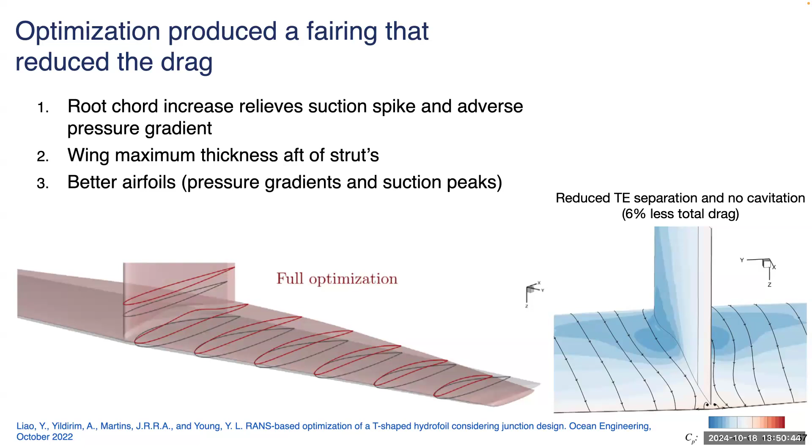Right, so now for this - this is the only slide I have on this, sorry. But we did some work that we're hoping to publish soon, so stay tuned.

This was work we did for American Magic, on the optimization of their foils. Hopefully they'll get cleared and you can read the paper, and we'll also present it at some point. But that's basically optimizing the foil here that you see.

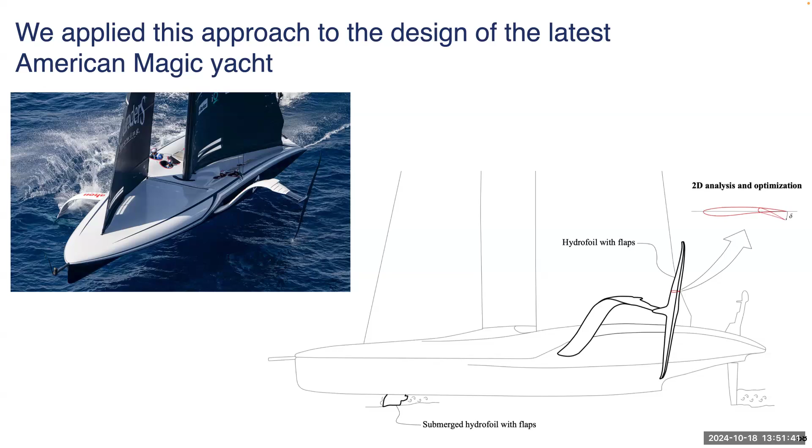I think everybody here is familiar with America's Cup and the boats. When I'm explaining this to people outside the field, I need to explain from scratch because not a lot of people know about it. But they're like, yeah, it's a hybrid between an airplane and a boat, and I really like that. So more on that soon.

The last topic here is we're currently adding dynamic aeroelasticity constraints. These are really important because now you'll have slender structures that are going to be vibrating, and you're going to be subject to undesirable elastic effects like divergence and flutter.

Galen has developed a code called DC Foil. Now we go lower fidelity in a certain aspect, and that's necessary because unsteady coupled CFD with structures can be done, but not in an optimization loop, not with the adjoint method. The adjoint method becomes very costly and challenging with unsteady processes, right? But we can do it.

We did an adjoint for this kind of model with beam elements coupled to a lifting line, to handle arbitrary oriented structures like this keel or foils and so on. So that's in the works, we've already published a paper on it, and we have more work to do on that.

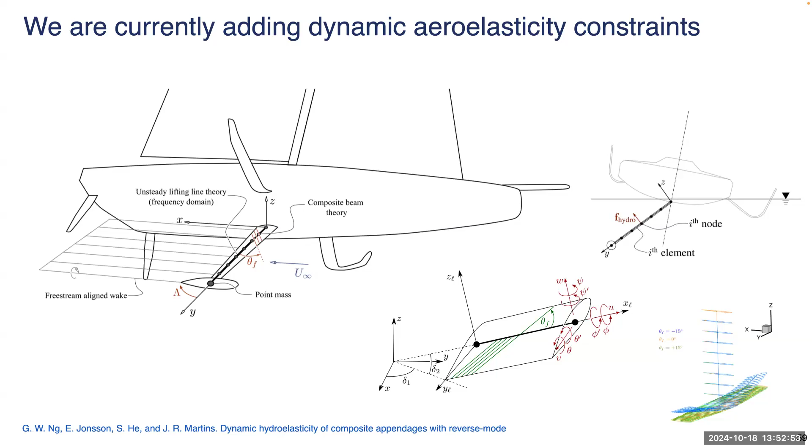So to sum it up here, we have a gradient-based framework where we can do multi-physics optimization, in particular hydrodynamics and structures. For that, we coupled RANS CFD and structural finite elements to do T-foils and other foils, and more recently, differentiated methods for dynamical systems.

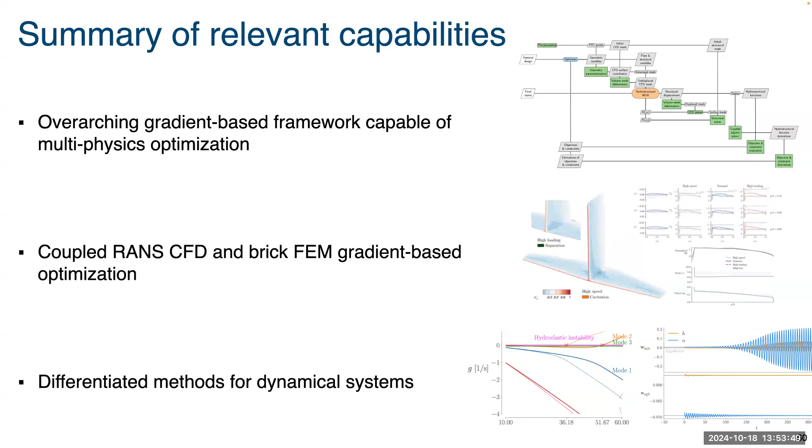Again, I want to emphasize, one thing is to have analysis, the other thing is to have efficient optimization, right? You can have analysis, but it's not just a question of coupling it to the optimizer and it works. In this case, because you have many variables, the analysis needs to be differentiated, and the whole loop needs to be automated so the optimization can include it, right? So that's a lot of effort to develop, but in my opinion, it's worth it - it gives you some insights into the design. Thank you.

Excellent. Questions? Have you found any particularly surprising results from your optimizer?

Yeah. Okay, I think you mean surprising in terms of surprising and useful, or surprising and useless? Surprising and useful. Yeah, okay.

We've had some, but if I had to pick one, for example, that T-foil having that bump on the foil, I thought that was surprising. Then you go back and look at the reason, and it makes sense, right? Then you realize, well, ideally you'd want to include the vertical strut as well, right? And then you might not have such a pronounced bump, because it strikes you as, okay, I wouldn't do that in real design - it doesn't look optimal once you consider more variables. So that's an example, yeah.

I was wondering, how do you prevent getting stuck into a local minimum rather than ending up with a true minimum of the optimization problem?

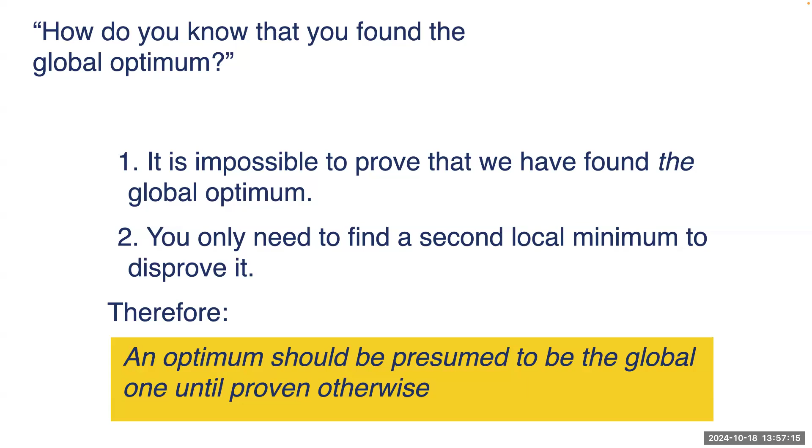So there are problems with multiple local minima. To answer your question more directly, to avoid that we start from multiple points and realize in this case we're not stuck in a local minimum. We found a global optimum, I'm pretty sure. That's my answer.

Is there any merit to using lower order unsteady models to couple the adjoint method with unsteady calculations? The dynamic elasticity or the DC foil model I was showing is a lower order unsteady model. The idea is we do shape optimization of the 3D shape using steady analysis, and then we constrain the aeroelastic properties with the low fidelity model. We've done it before, it works.

Has this sort of approach been applied to things in nature, like a bird or a certain species of fish? Is there a cost function, like when you constrain CL/CD for airfoils? I'm struck by how a cylinder goes to an airfoil shape. Are things in nature optimal in some sense according to some cost function? Oh yeah, I believe they are optimal in some sense, the trick is to figure out what the objective function is. Some studies have looked at this, and I've wanted to do it for birds, and why not for fish? Maybe one nice academic endeavor would be to reverse engineer the objective function that gets you that shape. I'm sure you can find something, but will that be the actual one? I'm not sure.

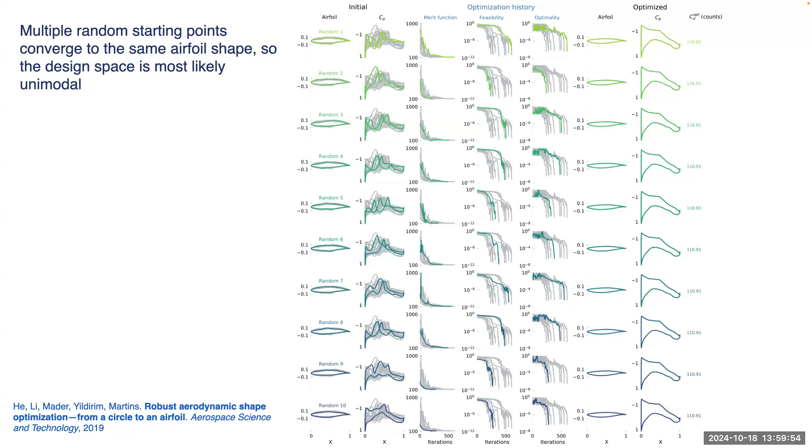I have a question regarding optimization. If you do optimization for a general design with a model, most of the time you're handling a nonlinear model, like when you're doing a dynamics problem. So I was wondering how the accuracy of the model affects the optimization. For example, you can have a very complex nonlinear model, but sometimes nowadays if you're only collecting data, you can get a linearized version of the model. If we use these two different models to do the optimization, do you think the accuracy will affect the results? Yeah, the accuracy definitely affects it, and we look at this all the time.

That's why we do mesh refinement studies and so on, to see what the effect is. Because the optimizer is great at figuring out the weaknesses in your model, exploiting any errors or any physics that aren't considered. So it's something you need to constantly check against. But sometimes you also need to consider the computational cost. Of course, then you make your trades, you pick your poison. But there are new ways to fuse the data between the two and do something smarter, getting into multi-fidelity methods.

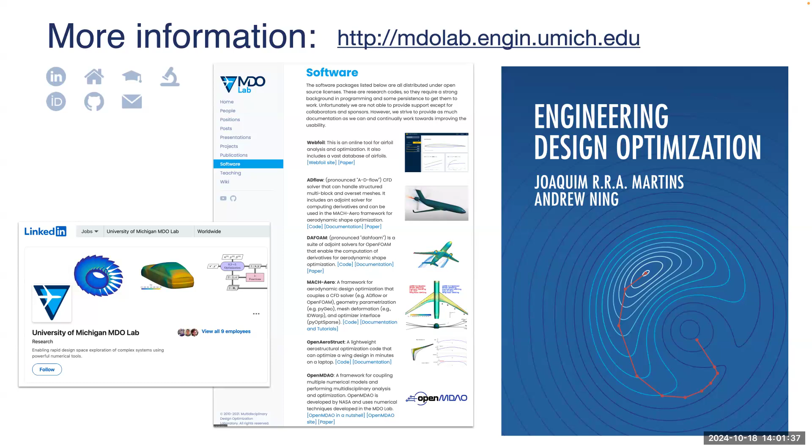No, thanks. Do we have some time for that chat? Yeah, 10 minutes or so. We have a meeting, I know, with Pat, and that's Jay, at 3, I think.